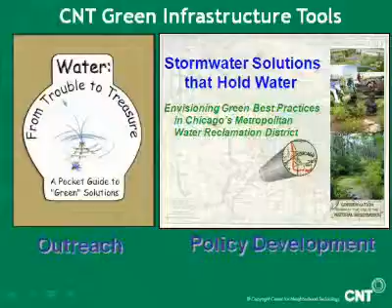We have an excellent GIS department that has made great strides in a number of research projects, bringing them to the public in terms of GIS mapping. One of the things we do is work with Chicago Wilderness and other entities on mapping the natural resources of the region, making the maps interactive so they're available online for anyone that wants to use them.

We have developed 3 different versions of an online calculator at greenvalues.cnt.org, meant for lay people, engineers, developers, and planning departments to take a preliminary look at a piece of property—whether a single site, a neighborhood, or even a small watershed—and look at the impacts, benefits, costs, and hydrologic changes that can be made by employing green infrastructure, so you can choose rain gardens off the roof, porous pavement, additional trees, swales instead of storm sewers, and green roofs.

Any combination of those things you can plug in using a template developed by you about your site, and come up with preliminary numbers in terms of how much money you can save, what kind of stormwater flow reduction you can get, and what kind of additional benefits you can get. So I encourage you to go online and use it, get a little practice, and hopefully you'll find it a very useful tool.

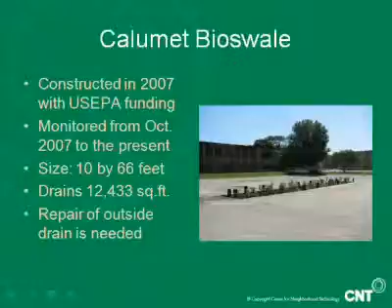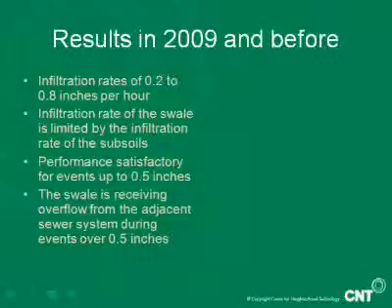But we still get good data as the facility draws down. So we find the infiltration rate at the parking lot. Even now, occasionally the water fills up, and now it takes a matter of a couple of days rather than a couple of weeks like it used to, because the bioswale works.

We find infiltration rates of from 0.2 to 0.8 inches per hour in the underlying soils, which is the governing soil layer there. Again, it works for about the first half inch of rain, and after that you tend to get the backup. But we're trying to get that repaired.

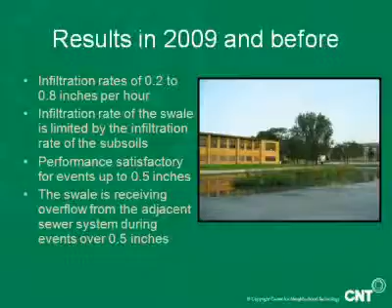I hope you can see this reasonably well from the back. Steve wanted to insist that I make everything darker, and I didn't know how yesterday.

We have 3 well points in the bioswale. The first measures this, the ground level, so one of the gauges would measure this in blue color. The red here is a well point a couple feet below grade that measures the water level in a stone layer underneath the soil, and then we have a deeper well point, just a few feet deep, that measures the water level in the deeper layer.

We have a rain gauge on the roof of the church that measures 5-minute intervals. We download it about once a month, as well as the meters in the bioswale. The slopes of these lines are most important in terms of determining just what happens with that saturated water layer in the bioswale.

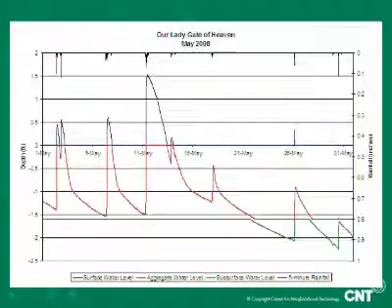We do have reports. The first two years we did this, we have a report that was produced for the US EPA, and that's available. We're now reporting to Nancy in the Sustainable Technology Center.

We're going to put a meter in the sewer that goes from the malfunctioning sewer to make sure we know whether it's going back or forward. I think there's probably three times the area flowing into the sewer as is flowing into the bioswale, so it backs up pretty quickly when it's plugged.

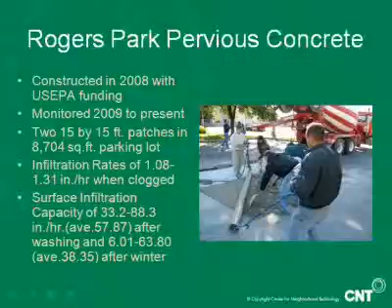We built them up because in order to protect them, we had to have them within the fence of this water department at Bellwood. To squeeze them in there, they're in a sort of swale that takes water from one end of the building to the other, so we were concerned that we would swamp the garden, and that's why we built them up.

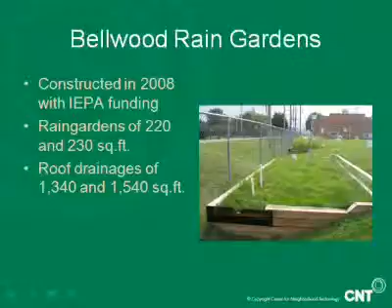And there we measured in 2008. What we found is that the performance of these things is such that really one well in each garden is not sufficient.

We also were measuring the rainfall in 5-minute intervals. We finally moved that to 1-minute intervals, and then we got similar kinds of charts.

What we found was not what we wanted to hear, but that the turf garden was vastly superior to the native plants in terms of the permeability, or of infiltration.

So we've continued to work, and what we found doing some testing with an infiltrometer is that the turf grass is 91 inches an hour, the native plants are 3 inches an hour.

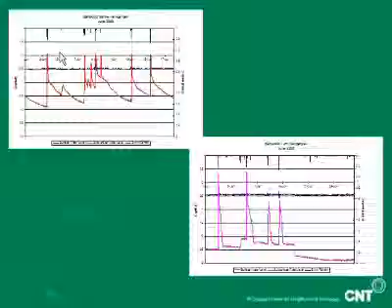Now there's some explanations for that. For one thing, the turf grass was replaced onto the thing, so that it was essentially pieces of grass stomped back in place, which was a much rougher surface than the native plants, which were planted on essentially mulch and soil, and they were immature. So the spreading of the turf grass kind of was immediately caught, whereas the other one kind of ran toward the edge.

But the other thing, the design had a flaw because despite lining, the edges of it leaked. So what we're now doing is most of our testing with the infiltrometers, which we'll talk about - we think is really the best way to go anyway.

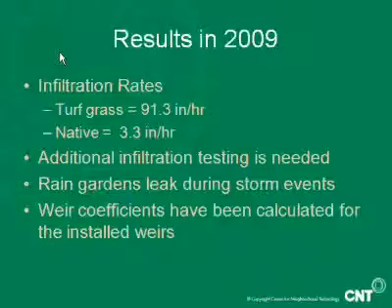By the way, we got a lot of help on designing these things in the initial work from the Illinois State Water Survey. We thought they would be doing the monitoring, but the sort of intensity of having to do it following a storm, they've got a limited staff, and it would have been impossible to do it. So we hired help.

When we got our funding from ISTC, the Illinois Sustainable Technology Center, we proposed that we would find another swale and do a similar kind of thing. We found a couple of things. One is that there are very few - we could not find anything comparable at all. We also found that there really wasn't much interest among our constituents, the regulators and engineers, to do these kind of things.

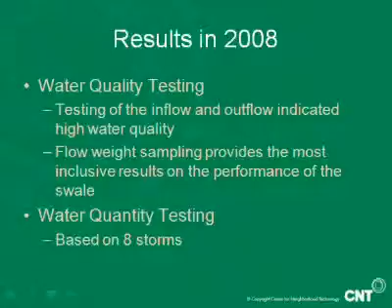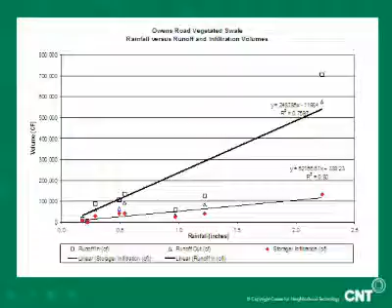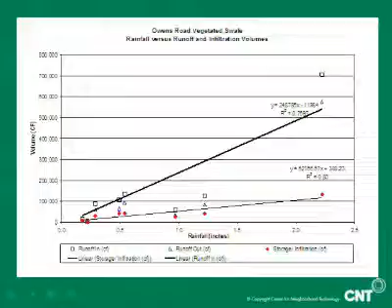So in this one, based on 8 storms, this dark line here is the rainfall up to 2.5 inches, and the volume in cubic feet that flowed through these swales during that storm. The volume lost is this line down here, and the diamonds here.

What we found is that roughly, for a given rainstorm, the percent of the total runoff - for instance, under a 2-inch storm - the percent of the total annual runoff under 2 inches would be here, and the percent of that removed in the swale is down here. So roughly some 20% of the stormwater that enters that swale can be expected to infiltrate over a typical year.

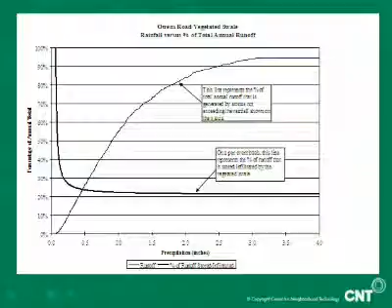So in some ways it was a very effective runoff reduction method. So what we propose to do this year, and what we're doing now, is to conduct an inventory of all the green infrastructure kinds of facilities we can locate in the Chicago region, roughly the 6 counties. And we are documenting them. And then we will run tests on some of them and report back to people who are interested.

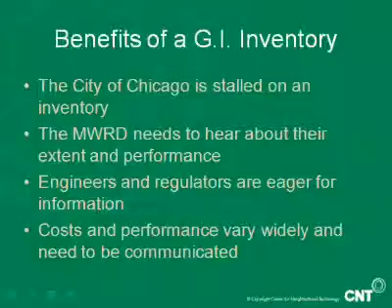What we found is when you've got just a few sites and you're dependent on the weather conditions, you end up with very little data over a period of time. And what we want to do is do a large number of sites and increase the level of data on those that are the most interesting, but be able to get a scan of a great number of sites.

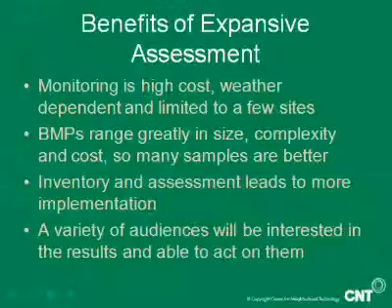So we've located about 82, 85, I think, measures, as it says here. Well, maybe it was back to the other one. Okay. What we're going to do is visually look at about 70 sites using procedures that are developed at the University of Minnesota, and then do capacity testing using infiltrometers at about a dozen of those sites, and then we will fill about 4 of them where it's appropriate, where you can fill them, and just measure how the water infiltrates over time.

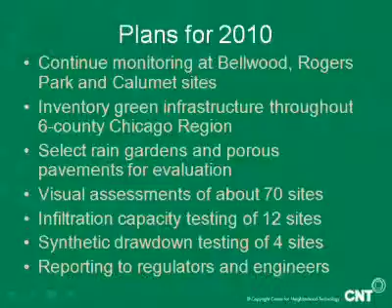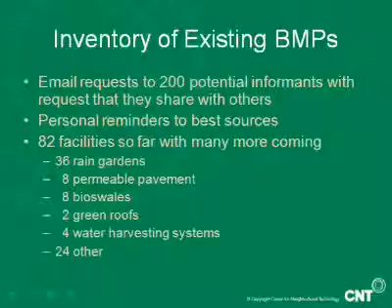So now we've located about 82, well, now it's 85 facilities. 36 of them are rain gardens. There's some permeable pavement and bioswales. I'm a little disappointed that we haven't found more by now, but a number of our best informants haven't yet inputted to the online survey. But we expect to have at least 200 facilities, and we will select about 70 for doing the work.

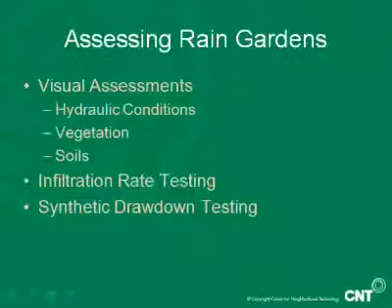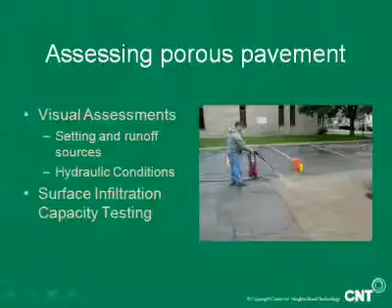Now, we've got a number of things that we're moving toward. I'll let Steve do some talking about some of them, and then we'll answer a lot of questions, hopefully. Well, thanks. So, as Bill said, what we've been talking about here is a lot of data and

monitoring from primarily individual sites, individual practices in one place. And if any of you have followed the application and development of green infrastructure, what we want to see in a more general sense is that this is a community scale practice. As Bill said at the beginning, the Center for Neighborhood Technology, we look for sustainability practices that work at neighborhood and community scale. So it's not just what can you do with an individual residence or a commercial building, but how does the neighborhood and the infrastructure of a part of a city, an entire community or a region perform, and how can we build individual practices up to a regional scale infrastructure.

Or even when you look at stormwater, it tends to be dividing urban areas into sewer sheds. So how do you get from a site-based practice, the performance level of a set of individual practices, up to a cumulative regional infrastructure performance? We want less combined sewer overflows. We want less pollutants reaching streams. We want less basement flooding in communities. These are the disturbing factors we're trying to manage when we're talking about stormwater management or rainwater management, as we begin to think about rain as a resource.

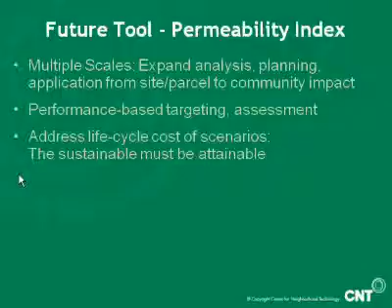And then looking at the life cycle cost of these scenarios, because the initial construction cost is just one piece of infrastructure planning. Infrastructure systems, bonding, financing, planning, and investment at civic levels, at community levels, tends to be on a life cycle scale. So our calculator and the estimates we want to do with this is to look at the long term, look at a 30-year or longer life cycle, which is comparable to other infrastructure investments, and say, how are you doing on a life cycle basis?

Because as you know, our basic philosophy is the sustainable has to be attainable. You have to deal with cost effectiveness. You have to be able to identify the times and the ways in which green infrastructure and other sustainability practices actually save money while improving performance over time.

And then improving just the accountability of performance over time, being able to check back and say, well, if our performance target was to reduce runoff by 10%, 20%, 80%, are we making those benchmarks? Are we affecting the community and the infrastructure on a collective basis that we want to, where only that which can be counted can be counted upon, and when you get into actual regulatory responsibility. Cities and communities have legal responsibility under the Clean Water Act to manage and reduce and control runoff and eliminate the negative impacts on water quality.

So the idea is to increase accountability through this and the degree to which green infrastructure can be a part of the solution. Finally, the idea then is to give yourself a better ability to capture the latent capacity of the urban landscape to utilize green infrastructure. That's what we're trying to do with this permeability index.

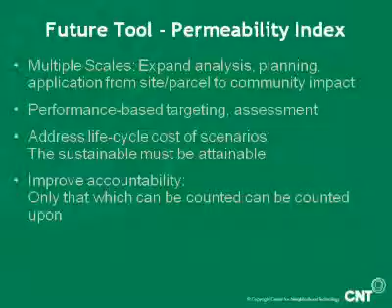And it would have three components, in some ways analogous to the research that this project is helping us to identify. We need a registry of existing features and a system by which we can collect where these things are being built over time. So we need to know what the baseline is, where existing impermeable surfaces, where existing permeable surfaces are, where the constructed green infrastructure practices are, and where they get built, so you can track how they affect neighborhood performance.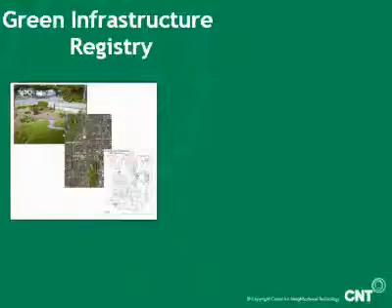This is an example from the city of Milwaukee and their best management practice tracking in terms of rain barrels and other practices around the city of Milwaukee. If you have this baseline, you can say, all right, how much water, and we have this performance data from the tracking that we're doing in this and other projects, how much should these features on a collective basis distributed through their sewer sheds and their watersheds, how much are they affecting performance in the infrastructure, how much could they affect, how many more do we need of rain gardens or vegetated swales or water harvesting facilities or green roofs, any of these practices, green streets, green parking lots, when you get to cumulative treatment trains, how many of those do you need to meet that performance target?

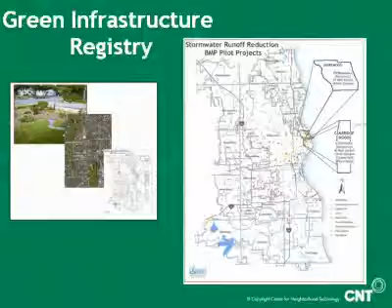And then being able to describe, as Bill said, in the registry or in what we're doing now for the survey, what the design components are, the depth, the underlying aggregate, some of the design components that actually affect performance of those things, keeping them listed in a registry. So again, we know what these features are supposed to do on a cumulative basis, and we can count what the performance should do over time.

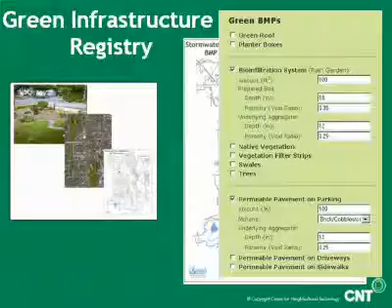So that's an example of a project, how we want to take this into the next step from doing monitoring data into an actual neighborhood performance monitoring tool. Another level of that is what we're calling least cost or sustainable Great Lakes water planning. The idea here is that, again, at a community scale, at a utility scale, we make plans to invest our infrastructure money on a long term, and we try to do it based on performance and cost effectiveness.

But if you cannot count the benefits of conservation practices, including, for example, the energy savings from not using pumped water, the cooling effect of having trees planted in urban areas and reducing building energy, the stormwater absorption some of these things do. So we're looking at trying to take this to a utility scale

and look at it in a planning framework, what's commonly called integrated resource planning on the water supply side or in energy and transportation systems, to do this integrated resource planning where conservation-based practices like green infrastructure would have an equal or preferable status in terms of selecting options and scenarios of how a community might do its infrastructure planning in the long term, taking advantage of and accounting for the conservation benefits of green infrastructure.

This is a new project. We're late in the first year of a 2-year project. We're going to have a workshop on this fairly soon in late April in Chicago, and there'll be more information about this project as well on our website.

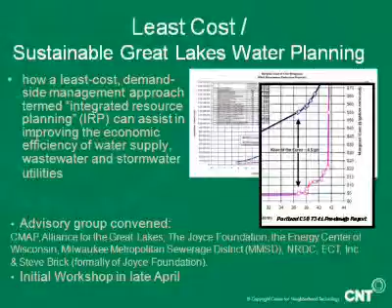And then we're also trying to figure out ways that some of these performance data can be integrated with policy making and policy decisions. This chart is preliminary information that we've been gathering for a State of Illinois study that we were working on with the University of Illinois Chicago, Illinois Sea Grant, the Chicago Metropolitan Agency for Planning, which was a product of state legislation.

Public Act 96-0026 last year said IEPA shall study standards and rules and regulations through which green infrastructure practices can be brought into the state policy for managing rainwater and stormwater. So we're working with these other partners on a study of what the effectiveness and cost effectiveness of green infrastructure practices can be, what policies may exist in other states, other parts of Illinois, elsewhere in the country that could become part of state policy to prioritize cost-effective practices that are ecologically and socially effective.

And these are just some examples where the construction cost per square foot of building a given green infrastructure feature is one thing, but what we really want to do is look at the performance, what you're delivering over time, the cost per cubic foot of water removed. And this is relevant at a national level as well, if you're following this with the U.S. EPA.

EPA has announced its intention of developing a new stormwater rule over the next 2 to 3 years. And based on existing research, particularly the National Research Council report from 2008, the idea is that instead of managing for control or sequestration of individual pollutants, it may be much more effective and efficient to manage for the volume of water. Because if you can slow down and reduce the amount of water running off into streams and lakes and water bodies, you're getting a proportional reduction in the amount of pollutants reaching those water bodies.

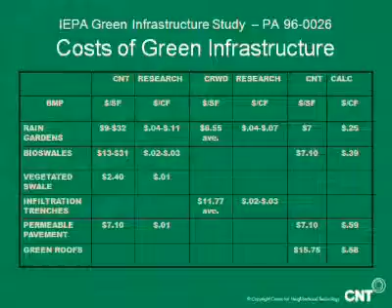In conjunction with, or in substitution for, conventional infrastructure investments. And then we finally come back to the idea that green infrastructure, being a distributed practice, is a lot of little things that have a big cumulative impact. We're essentially changing the way we think about how infrastructure needs to be developed and designed, going from centralized treatment and conveyance to distributed, natural-based systems across the landscape.

This was one of our first demonstration projects, at a school called the Al Raby School for Community and Environment on the west side of Chicago. We found that by removing 1,500 square feet of pavement, of sidewalk on either side of the school entrance, we were able to eliminate some basement flooding problems they had, and educate the students. One of our colleagues who was helping develop this school encouraged us to name the garden after Nobel Prize winner Wangari Maathai, and we found out she was coming to town, so we invited her for the dedication.

So if you're interested in meeting Nobel Prize winners, start some more green infrastructure, right? She came along and gave us what's been one of our mottos ever since: that this is the kind of project that needs to be repeated one billion times around the world.

So with that as our objective, we're going to need all of your help to achieve Wangari's noble goal. And with that, we'll thank you and be happy to answer questions about our monitoring project.

Maybe it's a good opportunity for ISTC and CNT to create a collaboration with a group right here in Champaign that is leading the charge on working with city staff, city council, and now a landscape architecture class, developing green solutions for stormwater management for the John Street watershed. Our leader of this group—we're well into this process, and it's going to become a model for the rest of the watersheds within the community. It's a wonderful ongoing project that seems to pull in very nicely with everything that you all are thinking about doing and monitoring.